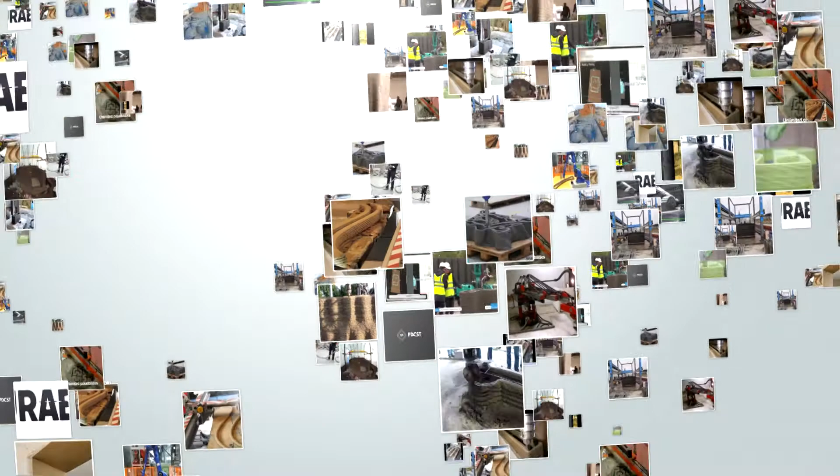Then, 3 years ago, I decided that this area needed close monitoring. When the size of the favorites folder in my browser signaled that it was not infinite, I realized that this option for processing information was unacceptable. In addition, the reaction to events and their assessment is only my subjective opinion. I wanted to know what other people think about it and what their opinion is.

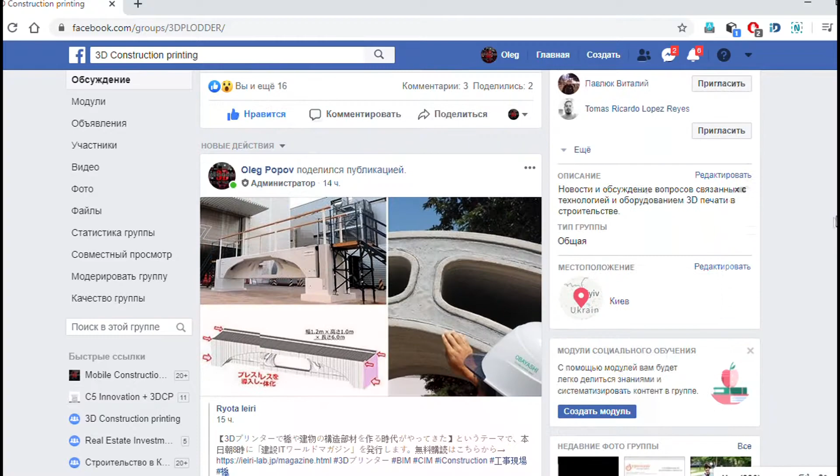3D Construction Printing is the name of a group on the Facebook social network that I created in March 2017. Daily monitoring of the internet space made it possible to create a digest of constantly updated news of the direction in the group's publication feed, with a membership approaching 2,500 people from 99 countries of the world. Analysis of over 3,000 different publications representing a large information array allows you to track not only the speed but also the direction of development of the 3D building printing industry as a whole.

My today's report will be related to equipment for construction 3D printing - that is, about building printers, the history of their appearance, options, performance, strengths and weaknesses, problems and solutions, and comparison.

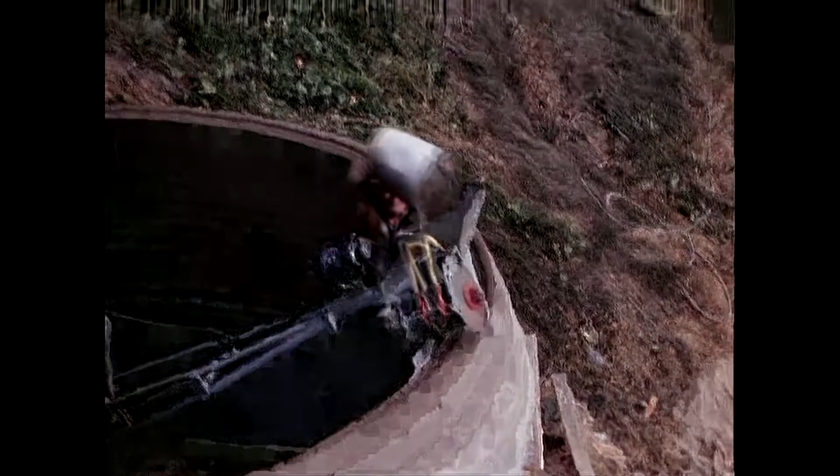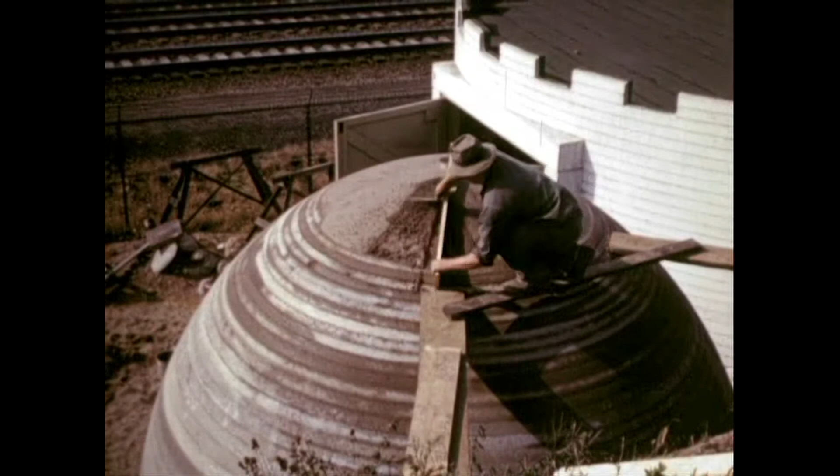If I was asked in whose hands lies the palm regarding the invention of equipment for 3D construction printing, I would probably name William Urschel. On October 20, 1941, he applied to the U.S. Patent Office to register a patent for a wall building machine. This person, most of whose time was devoted to inventing equipment for the food industry, is the author of the first building 3D printer. He created a prototype that successfully implemented the construction of a roundhouse.

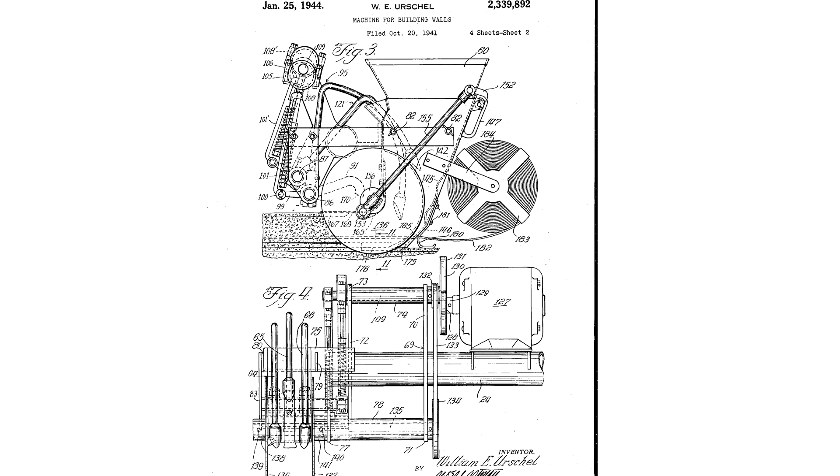As you probably already noticed, it took us 79 years to talk about it today. I may not be aware of existing earlier applications or ideas that, from today's perspective, could be judged as a 3D building printer, but this invention, in my opinion, had the opportunity to demonstrate its functionality in a really printed building earlier than anyone.

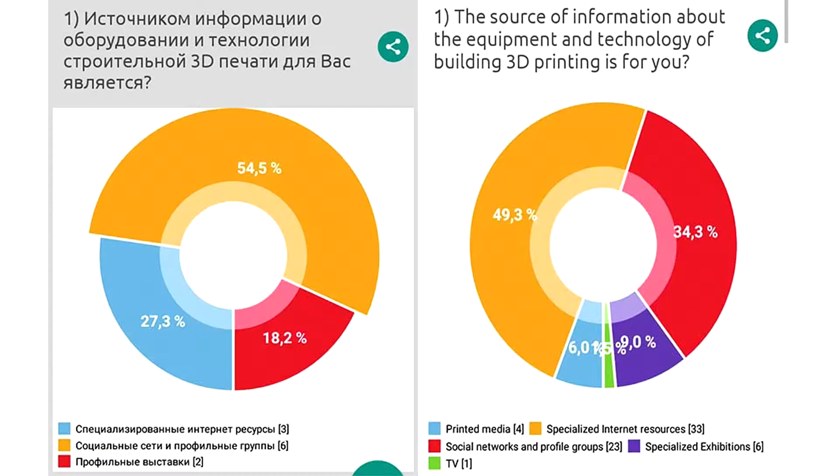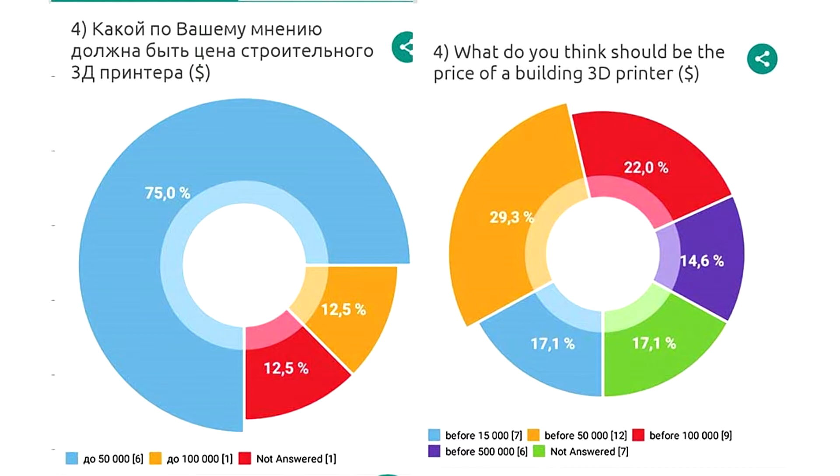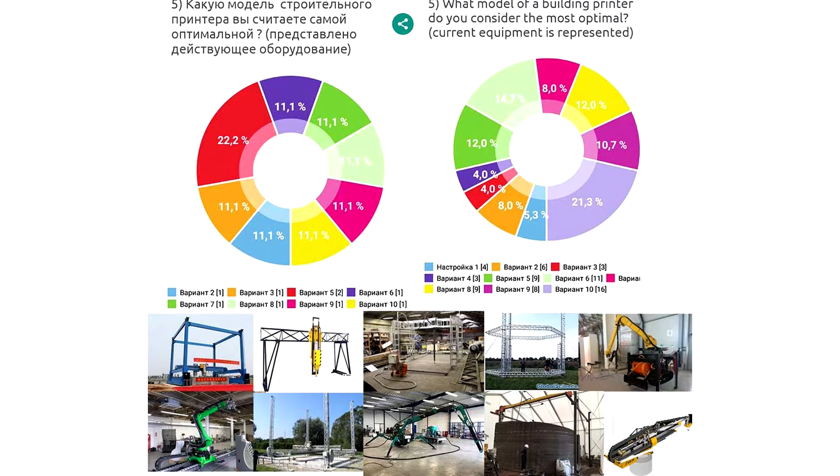For a more accurate and correct understanding of the wishes and expectations of possible users of equipment for construction 3D printing, I conducted a survey of group members, and I want to share the results with you. The results of the survey of English-speaking respondents show a slight discrepancy with the respondents of the Russian-speaking audience, but this difference is not significant and generally they complement each other.

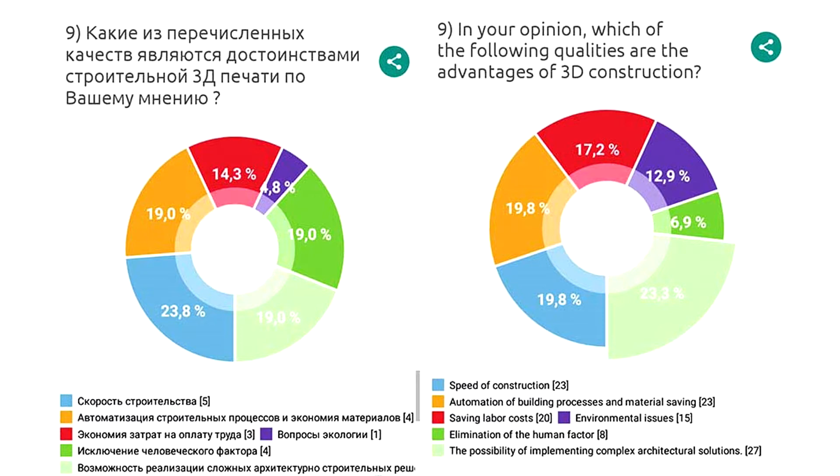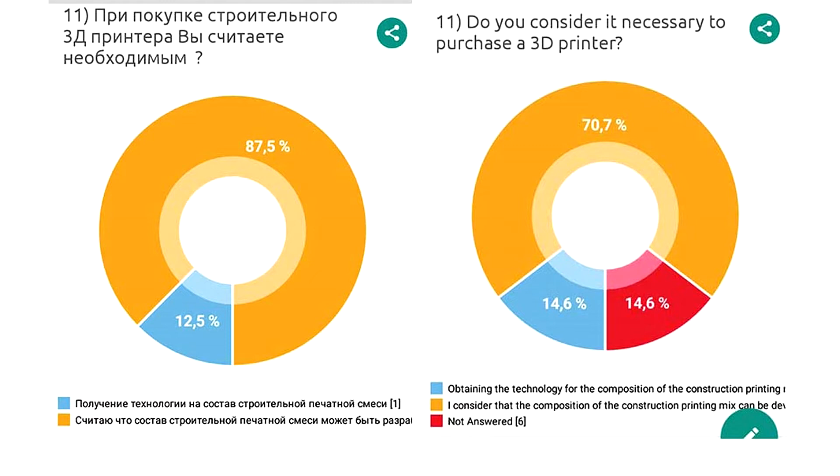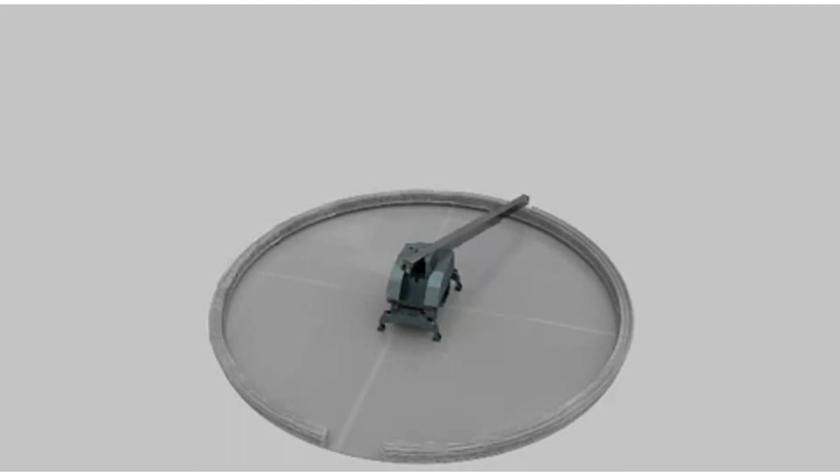Alexei Ishtanin, founder of the OSA One startup in 2019, using a design solution reminiscent of the principle used by William Merhill, created a prototype of a 3D building printer. In this video, you can see the principle of operation of this device as well as the dome structure that was erected with its help.

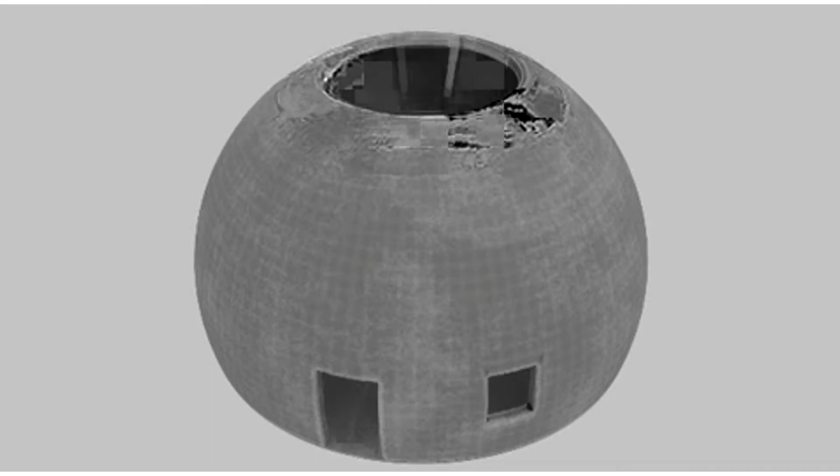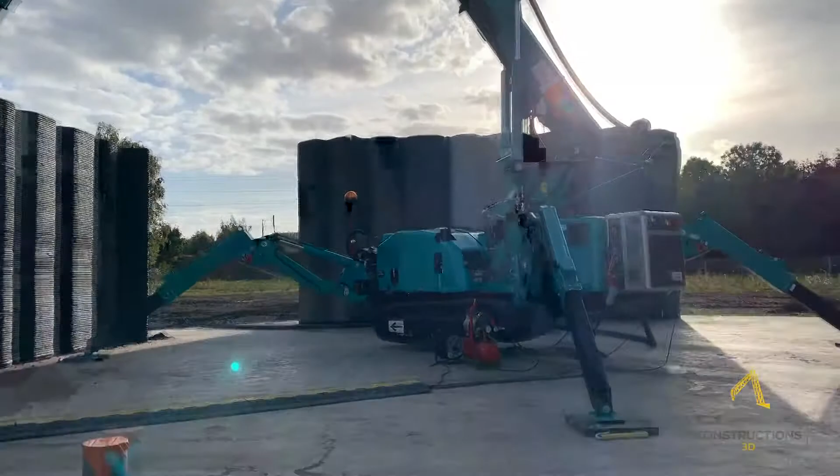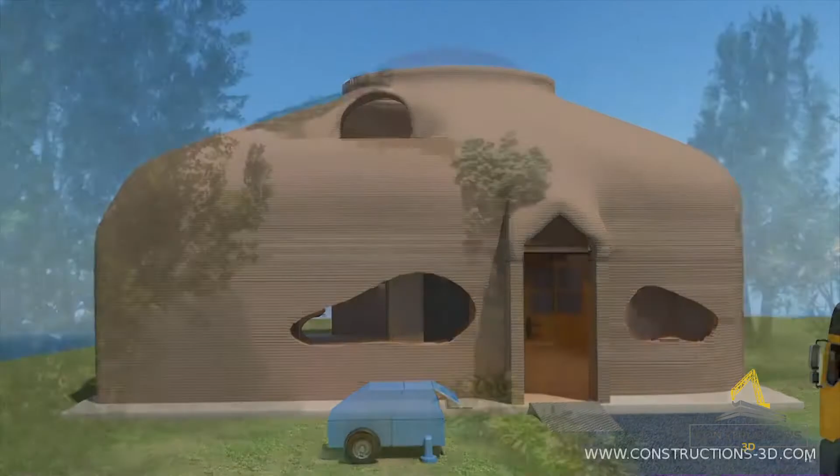The central position regarding the building being erected as a location for the printer is clearly visible in the technical solutions of such projects as Apis Core and your compatriots Constructions 3D, the successes of which I do not tire of rejoicing. I will not concentrate your attention on these projects for a long time, especially since the founder and leader of the Constructions 3D project is among us in this room, and I have no doubt that he will answer your questions with pleasure.

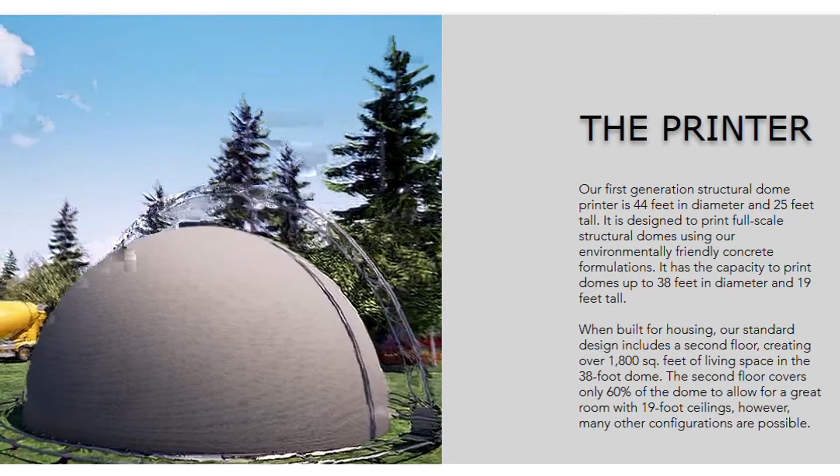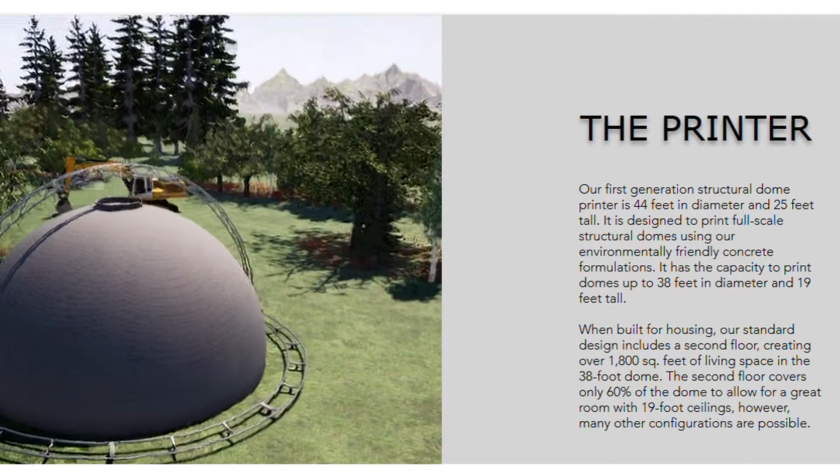My internet surfing of the information spaces of the network allowed me to discover an interesting constructive solution to the idea of a 3D building printer proposed by a project from the United States and announced in 2014. For 6 years, the project has undergone rebranding and demonstrates its willingness to cooperate in the construction of domed houses using the mixture shotcrete technology in 3D building printing and a printer, the design of which I consider to be very original.

I don't intend to abuse your time and even go into a brief analysis of studies of the Google Patents information base which, upon request, 3D construction printer issues up to 37,000 documents. I will try to briefly dwell on certain patents that characterize the focus in the production of 3D building printers that are currently on the market and are available for operation.

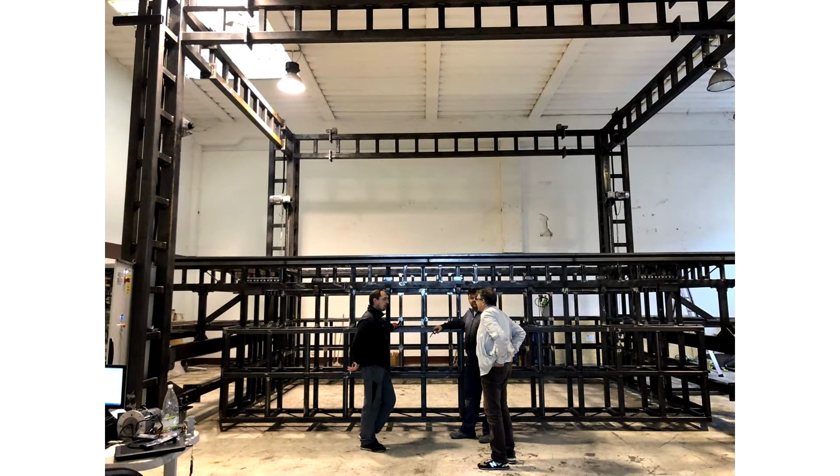I think that I'm hardly mistaken that among our contemporaries it is worth mentioning the name Enrico Dini, who for many years has been successfully working towards the development of construction printing. As an example, you can examine his patent application, which is based on the portal design of the printer. This study will help you understand how the 3D plotter differs from other printers.

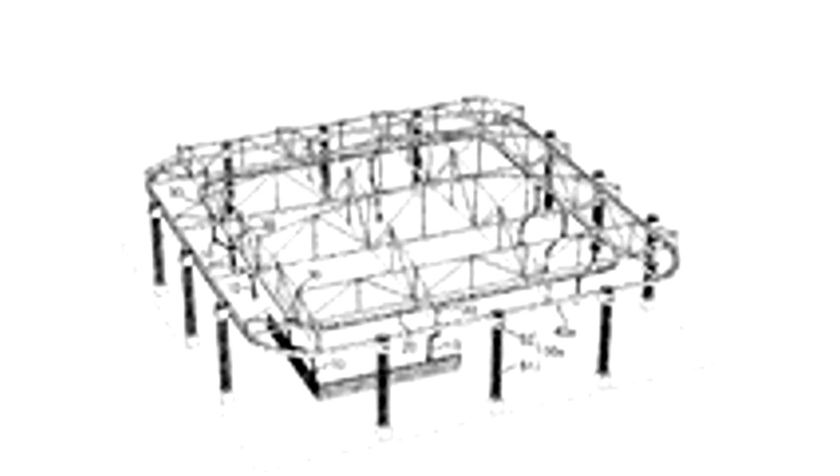A patent pending in Japan deserves attention for its size, but is unlikely to withstand criticism that the installation and dismantling times will exceed the printing time unless you consider it as a large-scale 3D printing factory. Costly project. The engineering corps of the USA Armed Forces, as well as a very similar project from Korea, have been demonstrating their successes for at least the past 2 to 3 years.

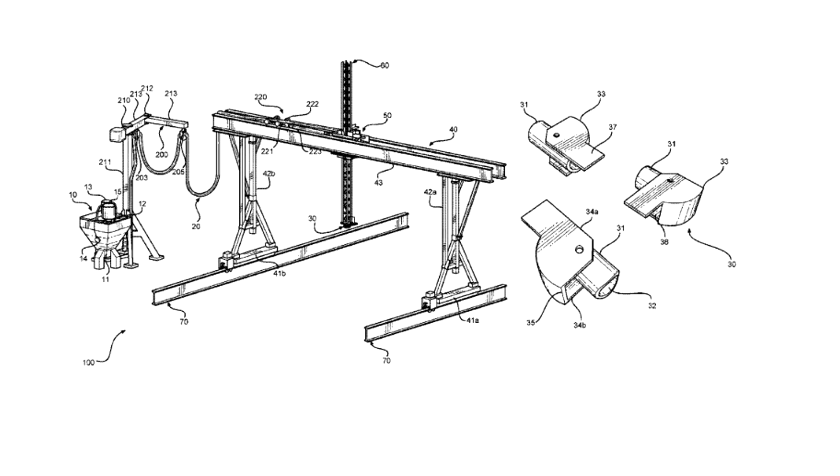Rails as a necessity in order to give mobility to the device, in my opinion, are not a strong link in this technological chain, since they require preliminary leveling of the surface, installation of the printer guides and their subsequent movement. This can also be attributed to the equipment of the Icon project.

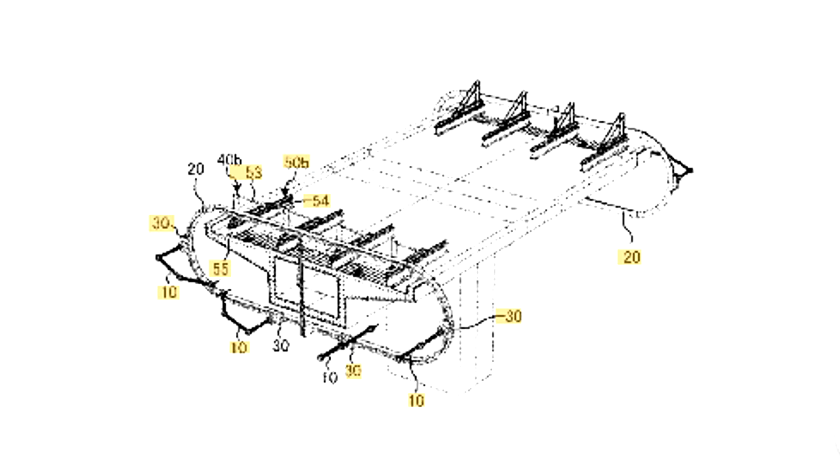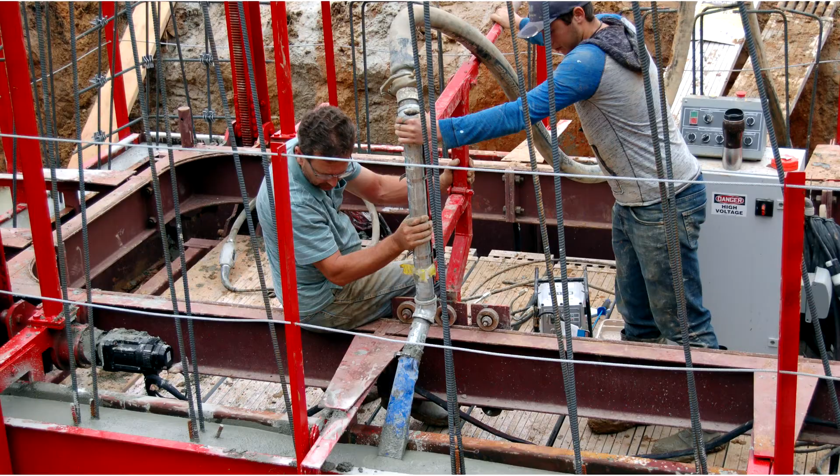I would also like to single out a project from the USA. The guys took their approach to solving 3D construction and it looks like they are getting it. Mobility in this case is not a necessity. Do you want to solve a problem? Do not go in the direction of its appearance. Apparently the guys don't even look there.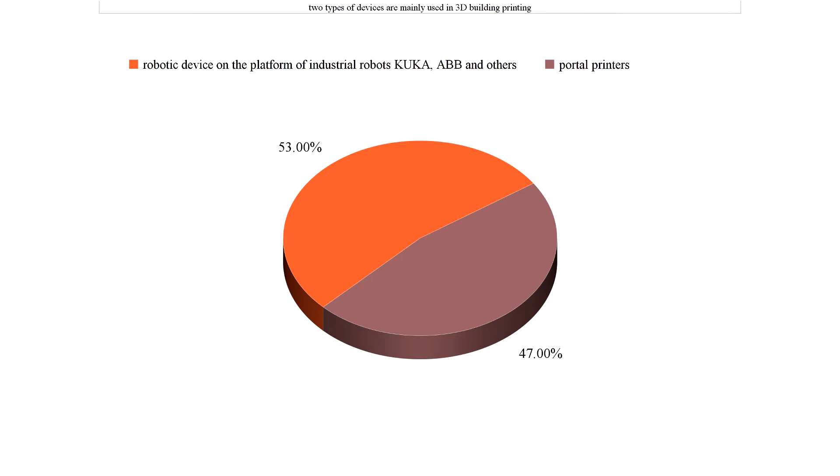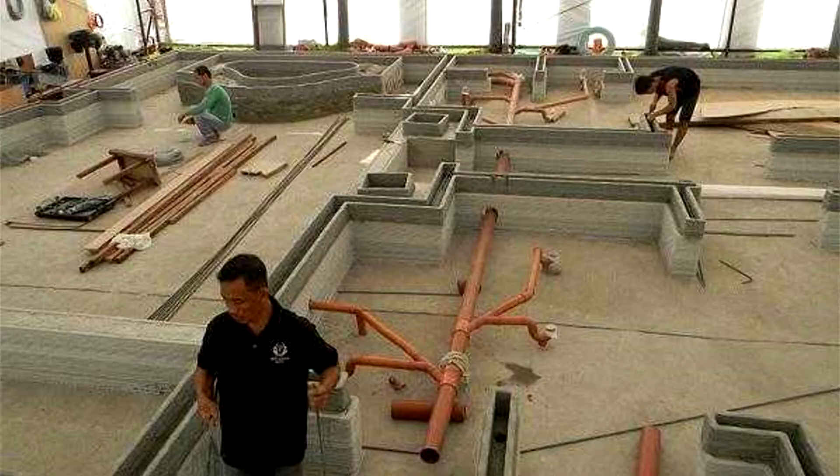According to the conclusions reached by Witteveen and Bos in August last year, 2 types of devices are mainly used in 3D building printing. One of them is a robotic device on the platform of industrial robots KUKA, ABB and others. Their share is 53% and, accordingly, 47% are portal printer designs. The disadvantage that all types of devices have when operating in the open air, directly at the construction site, is the need to equip a tent, or a protective dome, to avoid undesirable atmospheric effects affecting the printing process.

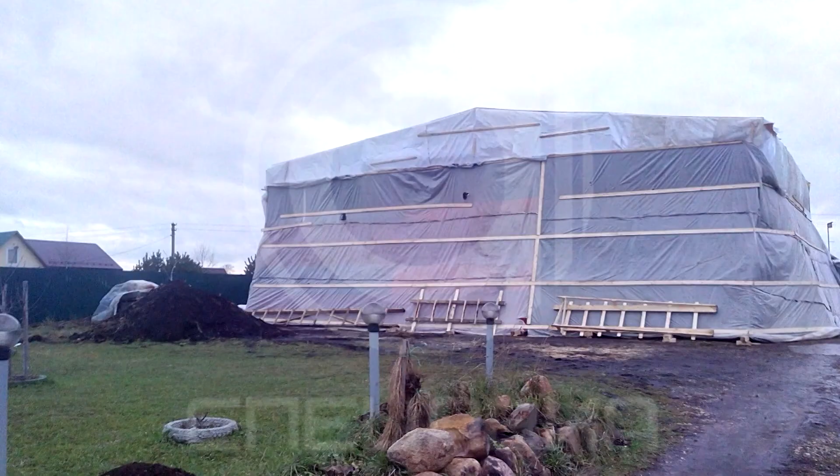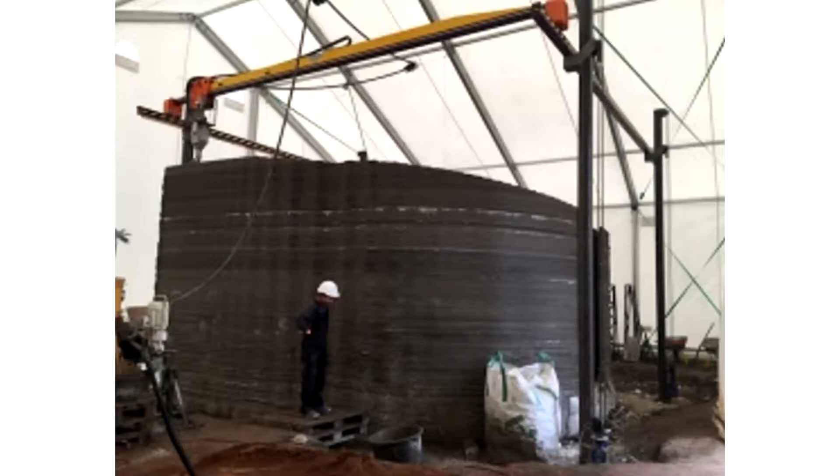The stationary placement of a building 3D printer of a portal design makes it less effective due to the filling of the printer's print field with finished products and the time that must be maintained before the product can be moved, which can lead to equipment downtime. In the same way, the efficiency of robotic printers increases with their mobility and decreases with stationary positioning. There is a pattern in the portal design of the printer. The size of the printing field is always smaller than the size of the printer itself, while the size of the tent is always larger than the size of the printer.

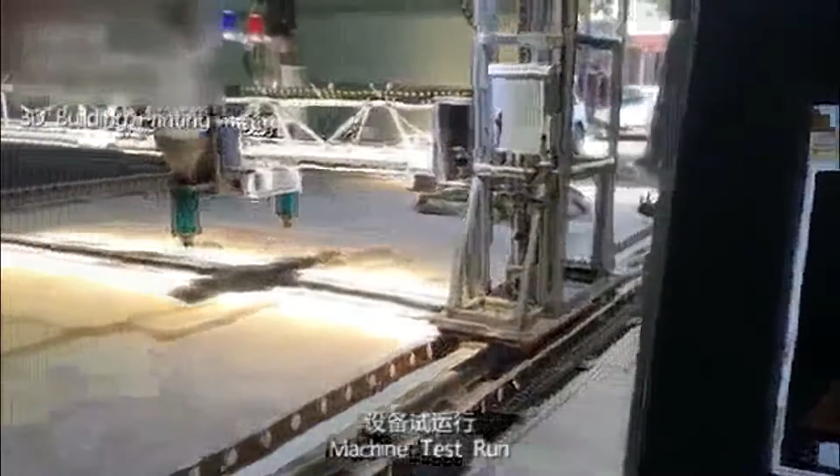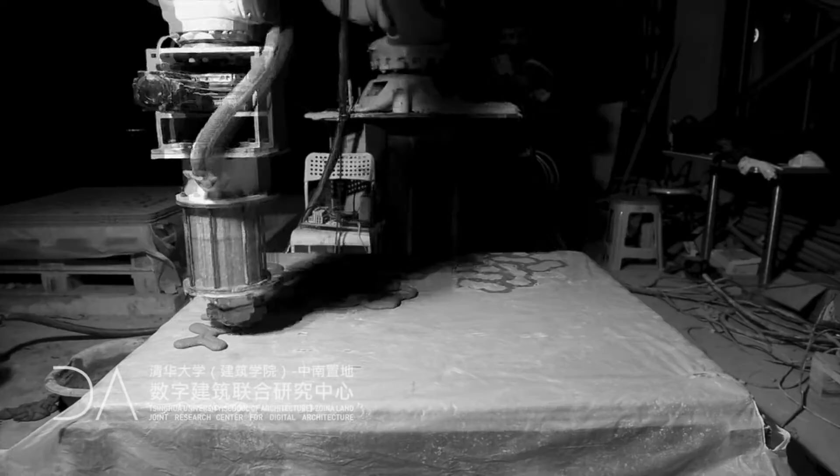One printer, one nozzle. This question was asked by inventors from China, and they increased the productivity of their device, but the increase in the use of consumables did not make the print field large. I would not like to be perceived by you in this case as a critic. I always respect the result of the work of any person or group of people with great respect, and I am aware that my thoughts are just my subjective opinion, which has the right to be expressed, as well as the opinion of each of you.

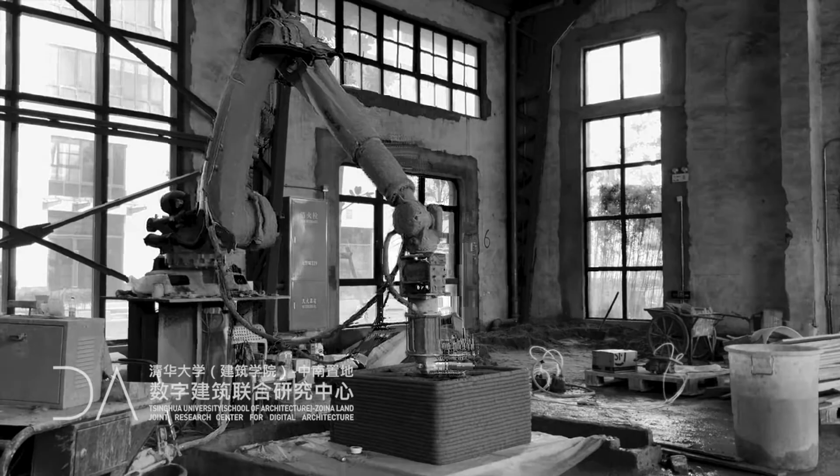If we pay attention to information from a survey of group members, we can probably identify the main issues that hinder the development of the construction 3D printing industry, as well as find out the distribution of preferences and expectations from the industry as a whole. Any development, whatever it concerns, is growth, expansion, increase. The growth of ongoing projects as well as their geography covers all continents: the UAE, Morocco, France, Spain, the USA, Russia, Mexico, China, Korea, Ukraine. The number of startups is increasing: Poland, the Czech Republic, Finland, Brazil, Russia, Switzerland, Austria.

The project from Ukraine was able to detect not only the product produced using a building printer, but also create demand for it, which allowed loading the equipment into around-the-clock operation. The number of scientific publications and research results from various laboratories and universities from around the world, which are aimed at creating new building materials for their use in building 3D printing, is proportionally increasing.

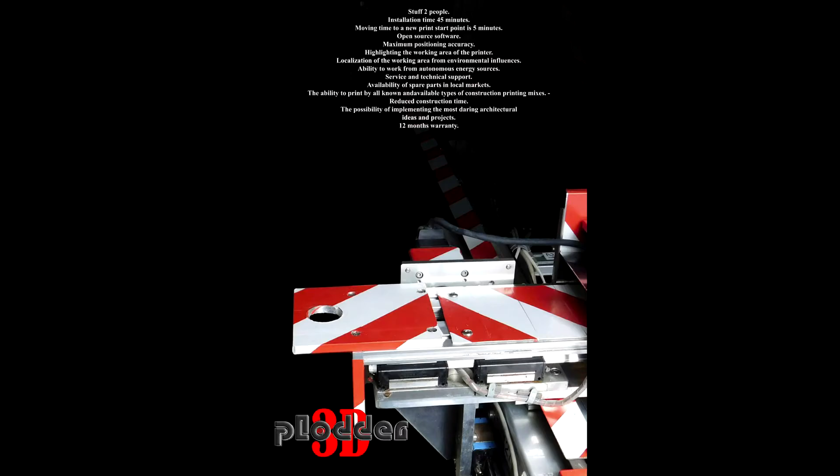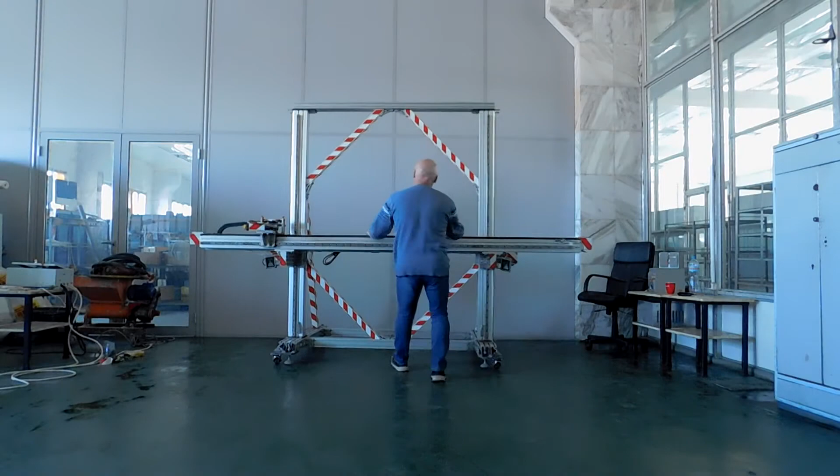And now I want to bring to your attention the product of our project. A mobile construction printer, 3D Plodder. The structural basis of the technical implementation of the printer is a solution defined in a narrow circle of designers as a Cartesian coordinate robot. What does it have in common with printers you know? Perhaps the fact that it prints in the same way as everyone else. How is it different? Mobility is implemented without a mechanical drive. Just one person's efforts are enough to move it.

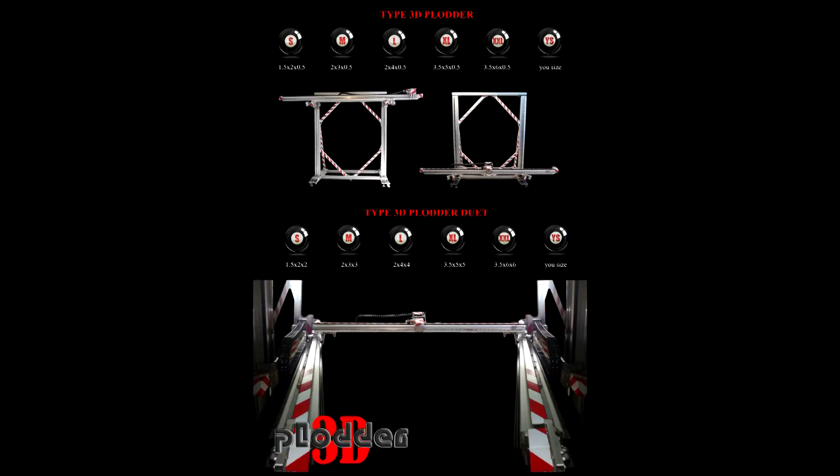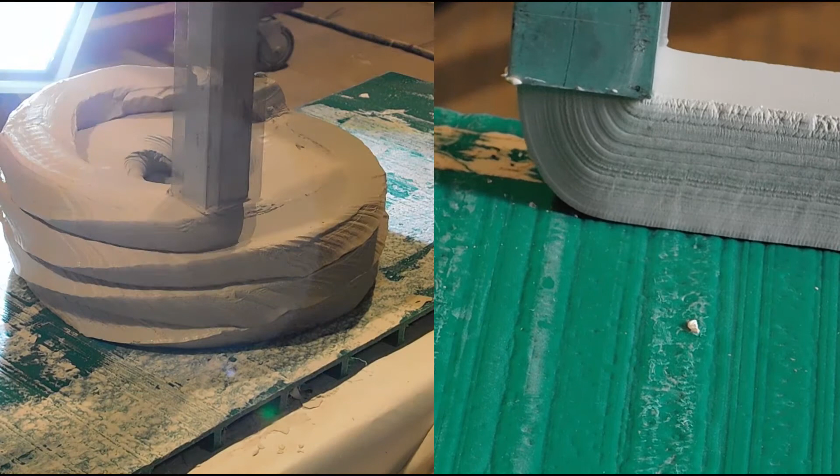The location of the printer relative to the print object does not matter, inside or outside the building. Localization of the print field from environmental influences with the ability to create and maintain a microclimate and the necessary temperature and humidity modes. Two printers can be transformed into a construction portal 3D printer for printing complex geometric shapes. One printer, one nozzle. The transformation of two 3D Plodder devices into a 3D Plodder Duet modification allows printing with 2 extruders and 2 X-axes at the same time.

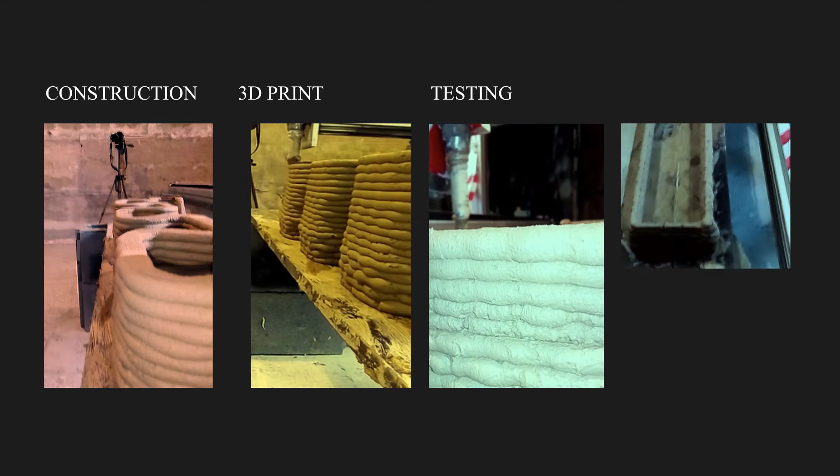I hereby confirm our readiness to supply 6 units of 3D building printers 3D Plodder within 2 months to organize a construction printing factory for any company interested in this. Among our plans is the completion of 3D Plodder radius, as well as testing equipment to solve the following technological problems in construction 3D printing: reinforcement, plastering, grinding, polishing, milling, applying liquid compositions, decoration. We are also considering the possibility of using a cartridge printing system and the use of equipment that could compete with existing solutions for supplying the mixture.

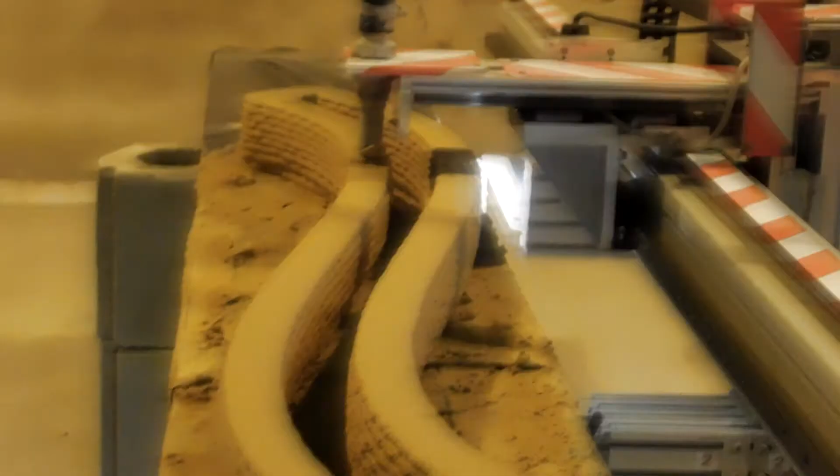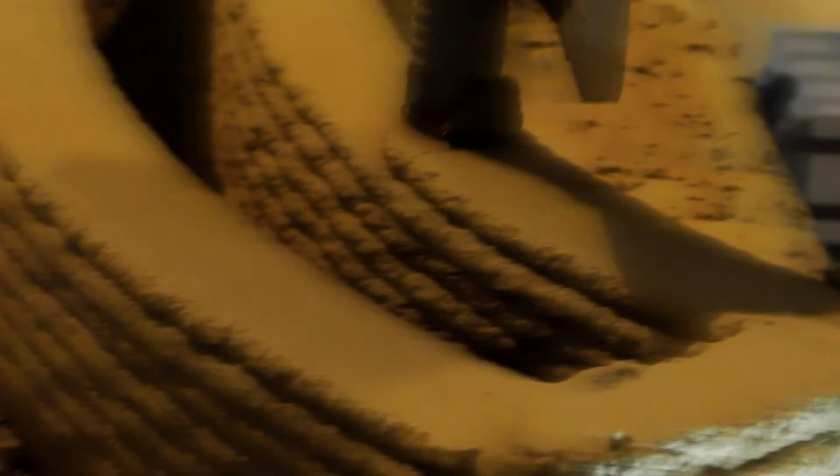One of the most important issues facing the creator of any product is the availability of a request for it. For pioneers of building 3D printing, the complexity of this task increases many times over. There are more than enough reasons for this. The construction industry is very conservative in the adoption of innovations. But on the other hand, the attention and funds allocated by global corporations for the development and research of mixtures for building printing inspire optimism and hope for change.

To my regret, in this short report I am not able to cover all areas of development of the 3D construction industry. In order to correct this situation, we are working on a global video review, which will include about 10 episodes and help you learn almost everything about 3D building printing.